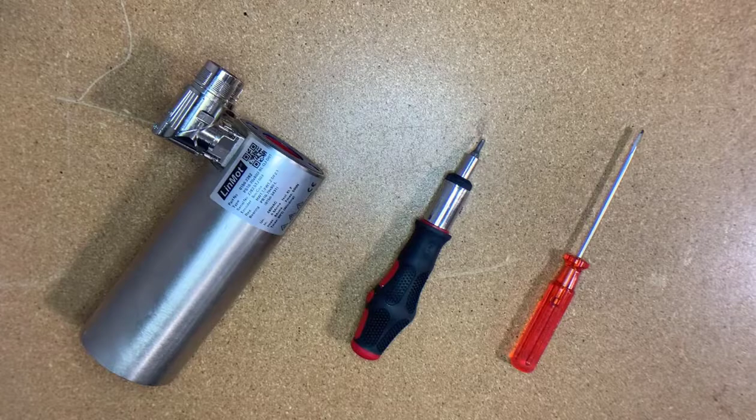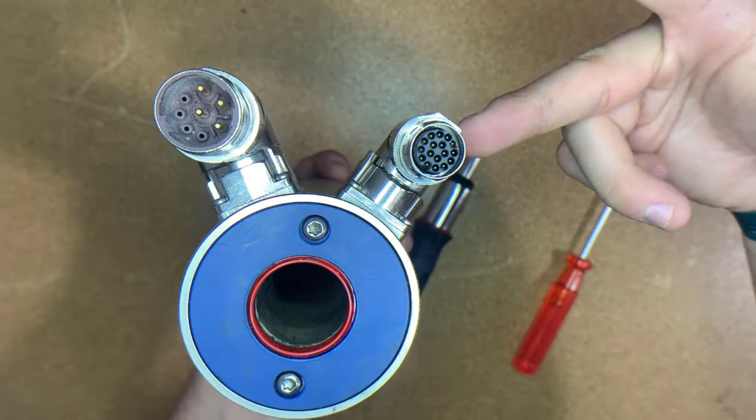The PS10-70 that I will be replacing the bearing on today has the part number 0150-2282, which can be found on LinMot's e-catalog.

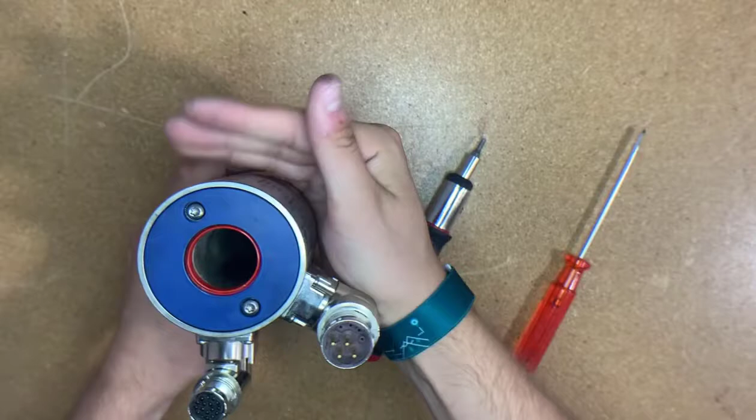The first step is to locate the side with the power connectors, as this is where the bearing will be able to be replaced. To do this, we need a star-headed torque screwdriver and a flathead screwdriver, mainly used for prying the cap off.

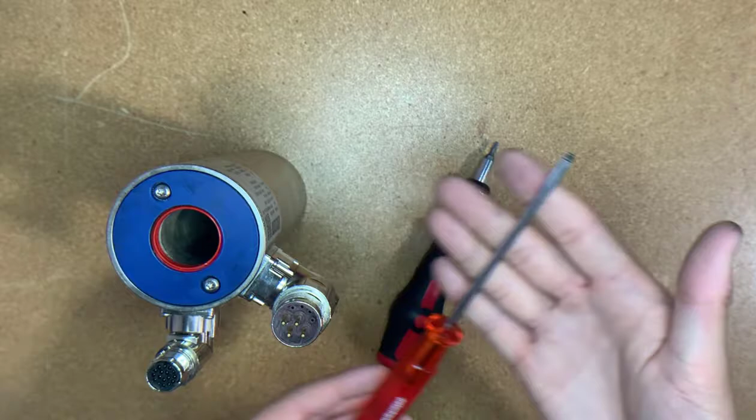The next step is to remove both star pattern screws atop the PS10-70.

The next step is to use the flat-headed screwdriver to pop the cap off of the PS10-70. But be careful, it does pop off very easily, so you don't want it to go flying.

After removing the cap atop the PS10-70, there's the last set of star-headed screws connecting the bearing to the PS10-70. Once you remove this, you will finally be able to take the bearing out of the PS10-70 to replace it.

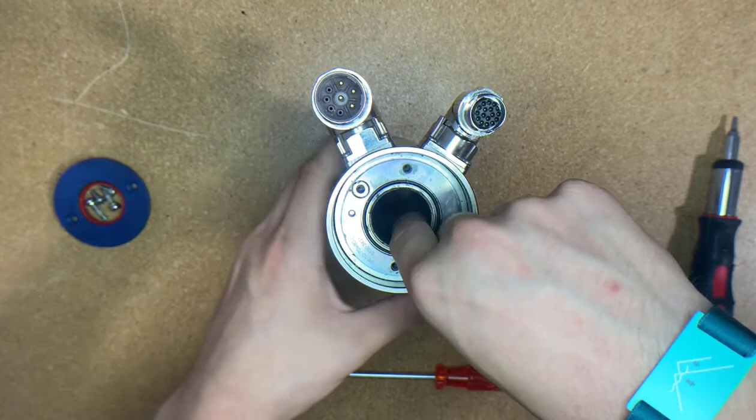To remove the bearing from the PS10-70, simply pull from within the hollow shaft until it is completely removed from the stator. When it is finally removed, you may experience some residue or contamination underneath where the bearing was.

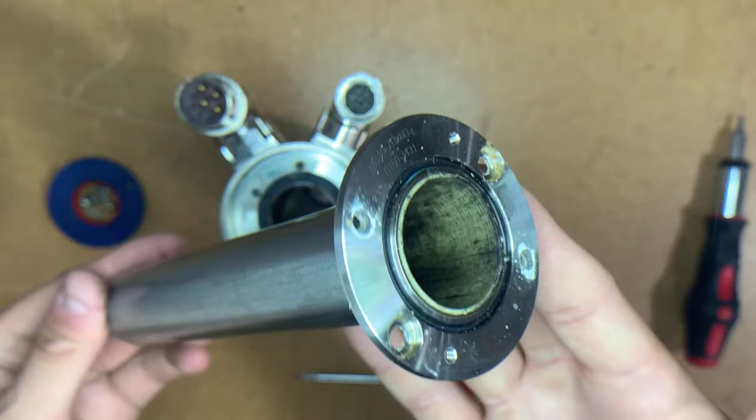This is extremely easy to solve using rubbing alcohol or any solvent.

Finally, you are able to replace and install the new bearing within the stator. Make sure when installing to line up the holes perfectly for both sets of star pattern screws.

The rest of the process is pretty simple, as you just rebolt and recap the PS10-70. Make sure when you are recapping to apply some force to push the cap back into place.

And you are now finished. You have successfully replaced a bearing in the PS10-70.

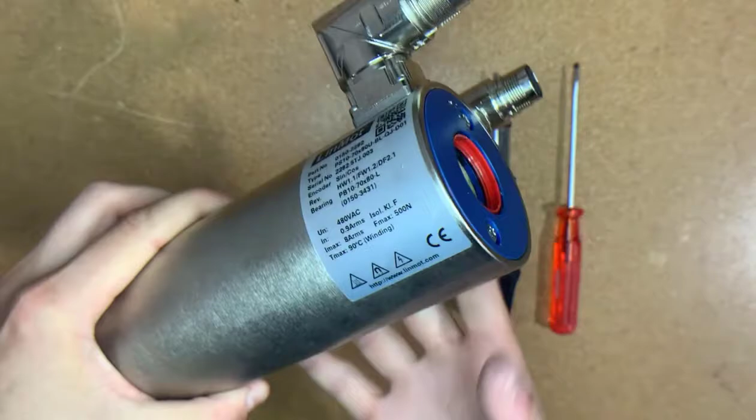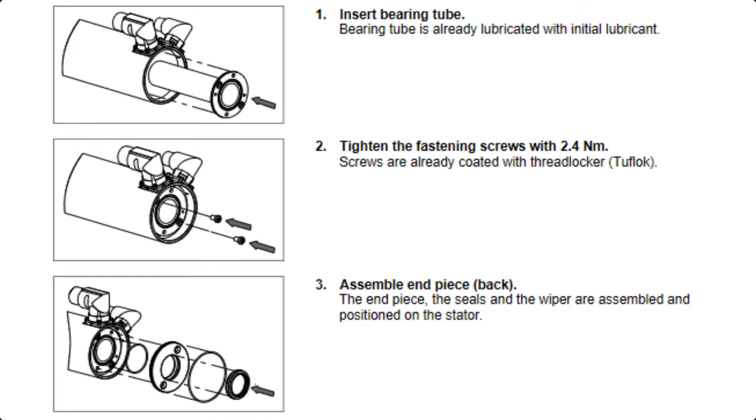If there are any further questions on the installation process or overview of parts of the PS10-70, make sure to go to the installation guide, as it shows an overview of all of the different parts that can be taken apart, as shown on the screen currently, as well as steps in which to take, which I have also just shown on how to replace the bearing yourself.

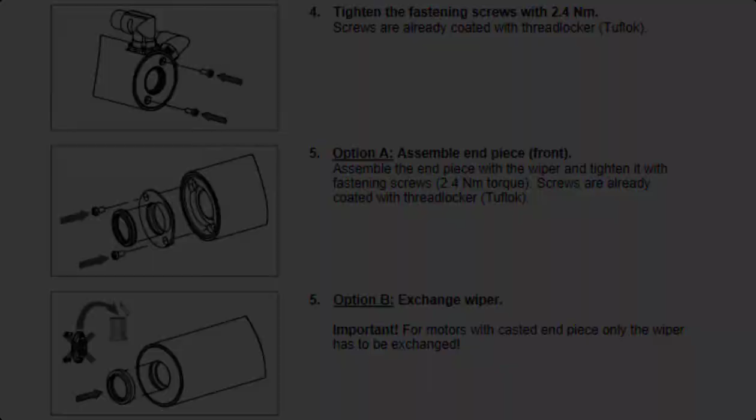The bearing kit for the PS10-70 can be found in the e-catalog under Linear Motor Accessories, and then following that under Bearing PB10-70 Spare Parts. Within here, you will find a variety of bearing kits.